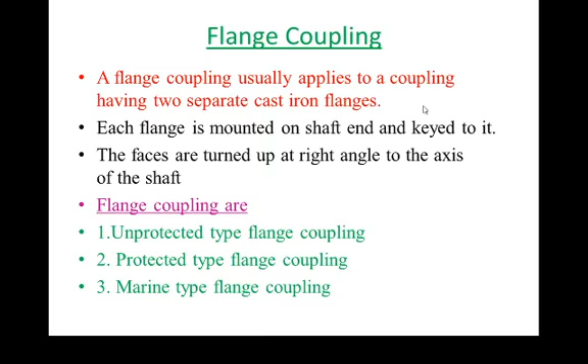These flange couplings are sub-classified into three categories: unprotected type of flange coupling, protected type of flange coupling, and marine type of flange coupling. Now let us see the nomenclature for the design of the unprotected type of flange coupling.

Suppose this is the input shaft and this is the output shaft. As stated, the shafts are keyed to the hub. This is the portion of the hub, this is the portion for the flange. Now shafts are keyed to the hub.

The two keys will be at an angle of 90 degrees to avoid slippage. They generally use a sunk key where 50% of the key will be in the shaft and 50% will be in the hub.

The hubs are connected to the flanges. This is the portion of the flange. This portion of the flange is used to connect or have the connectivity of the bolts, having a diameter of D1.

Suppose D is the diameter of the shaft, capital D is the diameter of the hub, taken as 2 times the diameter of shaft. Then D1 is the portion where the bolts are connected, taken as 3 times small d. The diameter of the flange is taken equal to 4 times d.

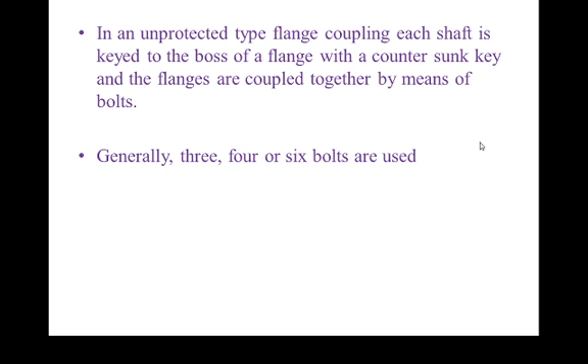Generally 3 to 6 bolts are used. Let us see the different proportions explained: D is the diameter of the shaft, or inner diameter of the hub, same thing. Capital D is the outside diameter of hub where the flange is connected to the hub, equal to 2 times D.

The length of hub is generally considered as 1.5 times of D. The pitch circle diameter of the bolt is equal to 3 times D. The outside diameter of flange is taken as 4 times D. TF, the thickness of the flange, is taken as 0.5 times D.

The number of bolts is decided depending on the diameter of the shaft. If diameter is less than 40 mm, then 3 bolts. If diameter is up to 100 mm, then 4. And if diameter is up to 180 mm, then 6 bolts.

Some designations: tau s is the allowable shear stress of the shaft, TF is the thickness of the flange, tau c is the allowable shear stress for the flange material, d1 is the nominal or outside diameter of bolt.

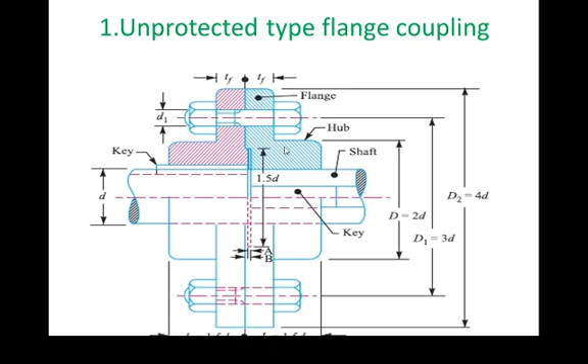Hub is being designed using torsional shear where it is connected with the flange. This portion, the hub, is connected at the diameter of D with the flange. This is the portion where it will get shear failure. Now what is this thickness? It is nothing but our Tf.

Now let us see, T by J is equal to tau by R. J is nothing but polar moment of inertia, as it is considered a hollow shaft. Hub is considered as the hollow shaft having outer diameter capital D and inner diameter small d. Therefore J is equal to pi by 32 into capital D raised to 4 minus small d raised to 4, and R is the distance of extreme fiber, equal to outer diameter divided by 2, that is capital D divided by 2, where capital D is diameter of hub and small d is diameter of shaft, also equal to inner diameter of hub.

Now the transmitting torque for the hollow shaft is calculated as pi by 16 into tau C into D raised to 4 minus d raised to 4, divided by D. This is our normal simplifying formula.

Then outer diameter of the hub is generally taken as 2 times the diameter of shaft. Then length of hub will be evaluated equal to 1.5 times of D.

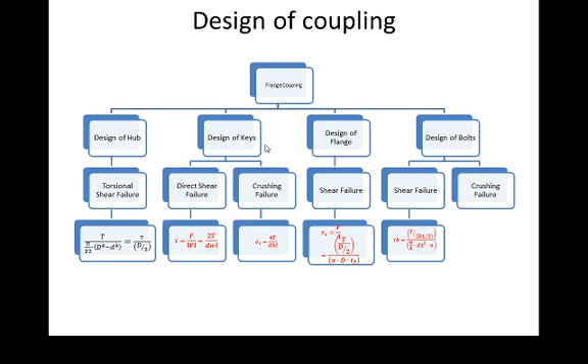Now here we design all the types of portions which are there in the coupling: design of hub, design of keys, design of flange, and design of bolts.

Next is the protected type of flange coupling. If you have seen the pictorial view for the protected and unprotected type of flange coupling, they are the same. Only the protection portion, TP, is added in the unprotected flange coupling, converting it into the protected coupling. Therefore, the design process of protected and unprotected flange coupling is the same, only with the addition of thickness of TP.

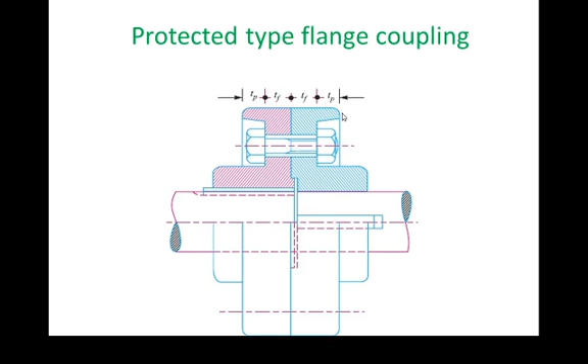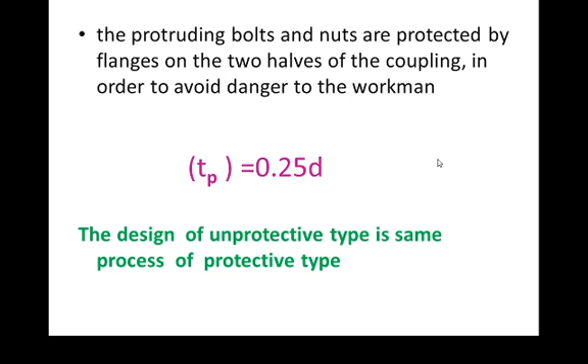This protection is required from the handling point of view. The TP thickness will be evaluated by the empirical relation: TP is equal to 0.25 times D. Therefore, the design of unprotected and protective type of flange coupling is the same, only by the addition of thickness of TP.

Now there are some steps for the design of a flange coupling. First, determine the diameter of the shaft. The shaft diameter can be evaluated using shear stress: 16T divided by pi d cube. Then the second step is to determine the key dimension.

The key will be evaluated using shear stress and crushing stress. Then we have to evaluate the width, height, and length of the key.

Then determine the dimensions of the hub. The length of the hub will be taken as 1.5 times D. The outer diameter of the hub is taken as 2 times D. Then by using torsional shear, we can decide the diameters of the hub.

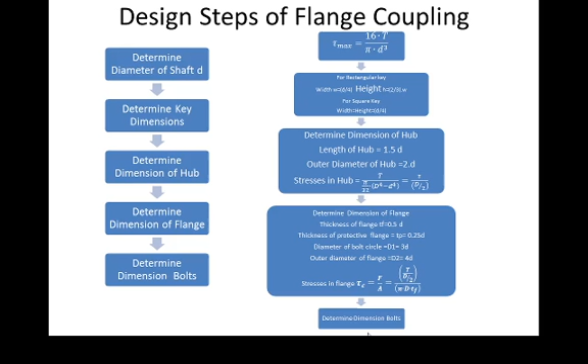Then determine the dimensions of the flange, and determine the dimensions of bolts. This is the entire process for the design of flange coupling, which is also required in our practicals.

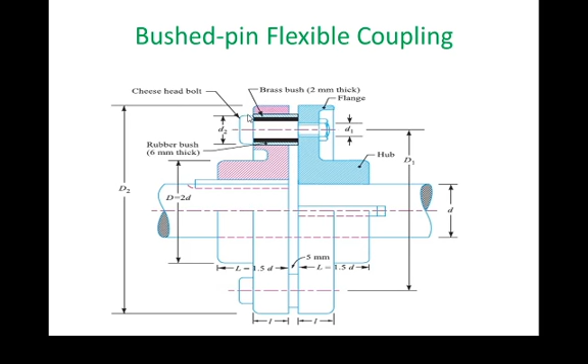Next is the design of a bush pin type of flexible coupling. This comes under the category of flexible coupling, where misalignment between the shaft and hub is tolerated. If you have seen the pictorial view of a bush pin type flexible coupling and protected or unprotected flange coupling, it is almost the same, only brass bushing is provided in the flange. This will absorb the vibrations and misalignments using the brass bushes. Other than the bush design being added, the process of designing a flexible coupling and flange coupling is almost the same.

Now how it is done: this is a modification of the rigid type of flange coupling. The coupling bolts are known as pins, and rubber or leather bushes are used to cover these pins. The two halves of the coupling are dissimilar in construction.

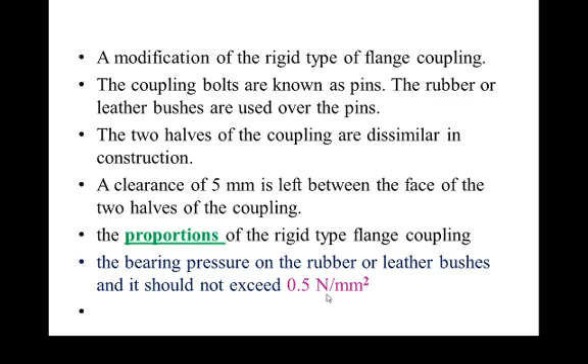A clearance of 5 mm is left between the face of the two halves of the coupling. In proportion to the rigid flange type coupling, the bearing pressure on the rubber or leather bushes should not exceed 0.5 Newton per mm square. Now, how to design this bush pin?

Let us see: D1 is the diameter, the inside diameter. L is the length of the bush, 5 mm is the thickness. D2 is the diameter of the bush. PB is the permissible bearing pressure. N is the number of pins. Capital D1 is the diameter of the pitch circle of the pin.

The bearing load acting on each pin will be calculated as W equals PB into D2 into L, where D2 into L is the projected area. Then the total bearing load will be equal to the bearing load per pin into the number of pins, N.

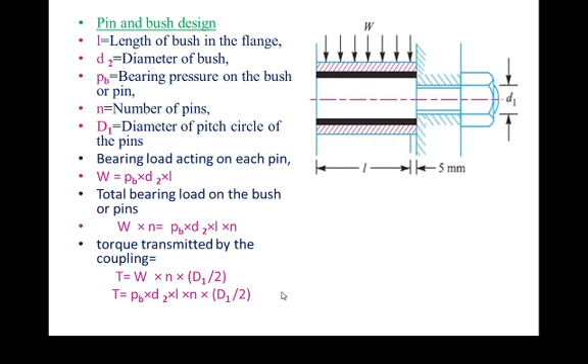Then the torque transmitted will be equal to W total into N into D1 by 2, where D1 is the mean diameter. That is, T equals PB into D2 into L into N into D1 divided by 2. The pin falls under direct shear due to the pure torsion of the coupling, so the torsional shear stress equals W divided by pi by 4 into D1 square.

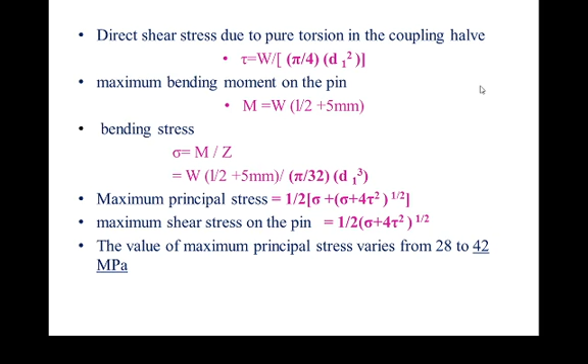The maximum bending moment permitted in the pin is equal to W into l by 2 plus 5, therefore the bending stress equals M by I equals sigma by y, so sigma equals M divided by Z. The maximum principal stresses and maximum shear stresses in the pin will be evaluated as shown. The value of maximum principal stress can vary from 28 to 42 MPa.

This is entirely regarding the design of coupling: protected flange coupling, unprotected flange coupling, and bush pin type of flexible couplings. Thank you.